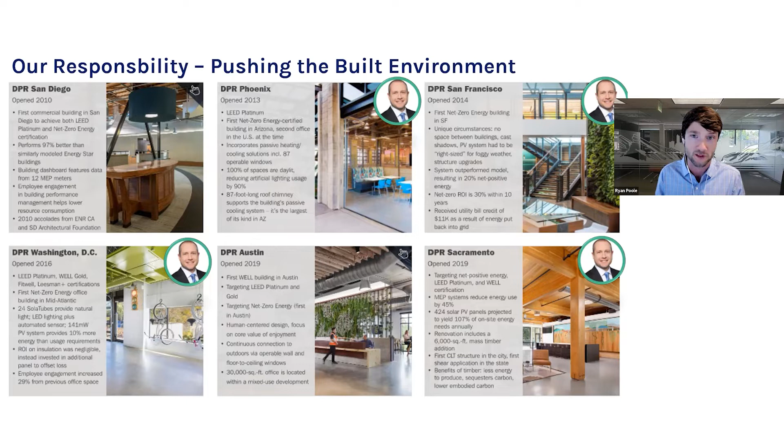Some of the specific strategies we took, it's important to mention that each one of our offices is in a different climate zone where we focused on zero energy. That was so we could particularly focus on different features within each one of those. This highlights 6 of those and some of the different strategies, some similar, dependent on the specific climate zone and situation of the office space. Really excited for Marshall and Stet to get a little bit deeper into the strategies we took specifically on the new Sacramento office.

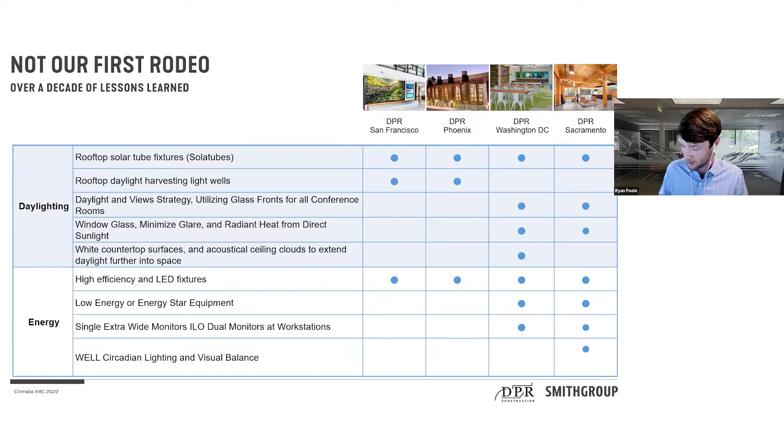A little bit about the path to net zero energy and our DPR recipe. We've created a high-level graphic that showcases what we believe is the minimal features to put in when you're trying to create a zero energy space. You'll see common things like rooftop photovoltaics, and then some more unique solutions like solar tubes or a vampire shutoff switch, which kills all of your non-immediate power for the night.

Operable windows, building performance monitoring, and also our very prized big ass fans, which are high volume, low speed fan systems that keep air circulating through our space for wellness and energy reduction. We're excited to continue talking about how we've utilized some of these strategies in specific locations. I'm going to kick it over to Marshall and Stet to start us off with what the owner's project requirements are.

This project was unique for us. Normally we're given a set of owner's project requirements, but for this one, we are our own owner. So we did take a moment to stop and think about what we're doing first, and let's go ahead and still continue those best practices we have for other clients and projects, and do that for our own. This set we see here is specific for the Sacramento office.

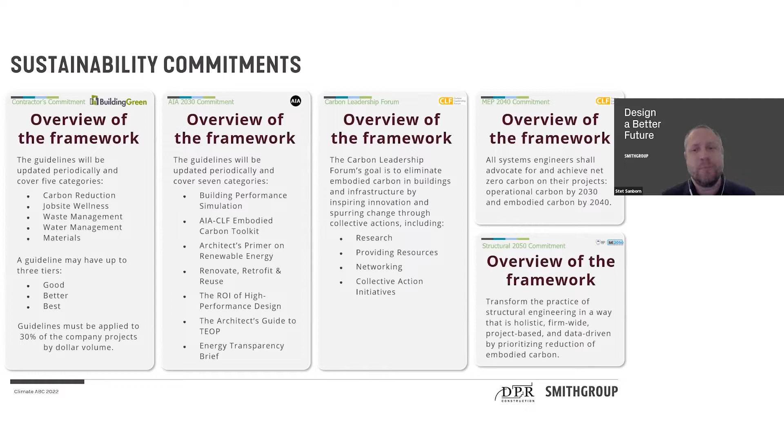When we look at them collectively, we can actually have a tremendous impact on reducing the carbon footprint of our buildings, and challenging the way that we build. And it's not just about the carbon, it's also about the experience. Part of what we'll talk about today with DPR's Sacramento office is how those things overlap and help reinforce a more holistic message.

Let's recap that common theme we'll be talking about through these commitments in our offices: embodied carbon, operational carbon, and wellness for the occupants. There's such a big synergy there that's sometimes overlooked in how we end up creating a healthier environment for both people and the planet, because they're one and the same.

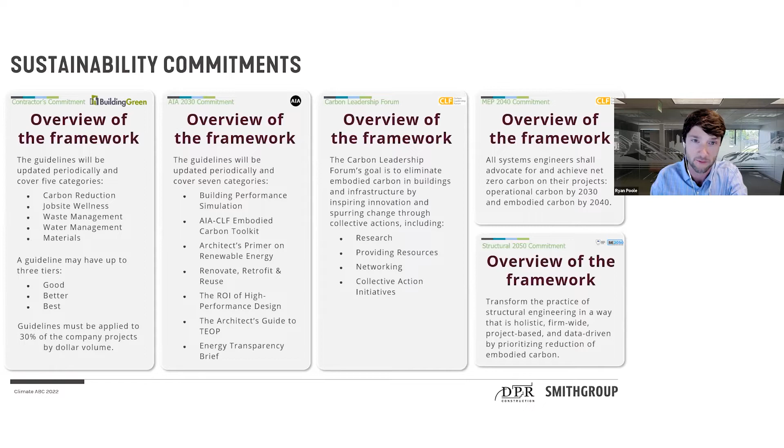I'm going to jump in and show you where we are in that 2030 AIA commitment. We're trying to march towards all of our new construction by 2030 being carbon neutral, whether through on-site PV, on-site renewable energy, or offsets. But we're really close to 2030. When I look at the calendar, I get a little nervous—it's 8 years away, a little less, that we need to be carbon neutral, and that's really to avoid completely catastrophic climate change.

We're already seeing the impacts of choices we've made in the distant past, and we actually should be going faster than this. But today, if I were to meet the 2030 challenge, I'm really trying to target like an 85% toward carbon neutral for all construction today. So we're marching towards that.

The DPR Sacramento office is actually a case study in how to go faster and do better—how can we go above and beyond the 2030 target today, at a reasonable cost, in the time frame, with today's technology? And it's possible. So today's message is both energizing—like, you can do it—but also, it's not that hard, so we should be doing it. Everybody should be doing it. So it's a little bit of carrot and a larger carrot.

One of the really interesting things as we design net zero energy buildings, from an operational carbon standpoint, we talk a lot about putting solar panels on buildings or near wind farms—renewable energy to offset our use. One thing we haven't talked about until recently, really the last 5 to 8 years in a robust way, is: if the operational side goes to zero, where's the rest of the carbon coming from? A good chunk of that is on day one of the building, not over the 30-year or 50-year lifespan.

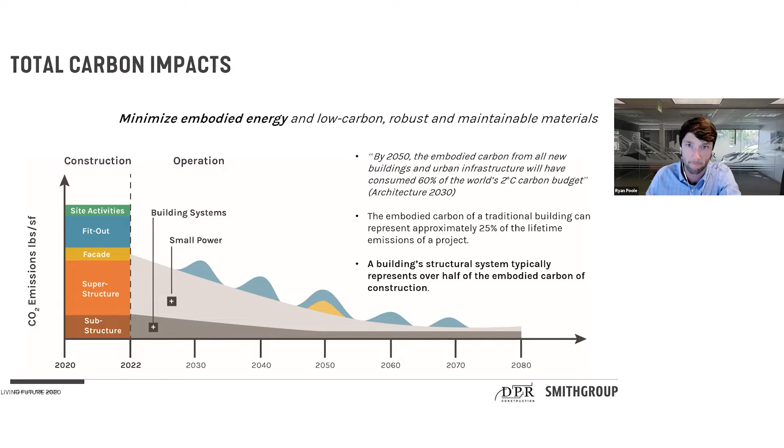A nice takeaway from this graph: in typical building construction, the structure itself takes up over half of that carbon footprint. So if you want to spend your time wisely on where to focus your efforts, just going after the structure alone is going to have your biggest impact with minimal effort.

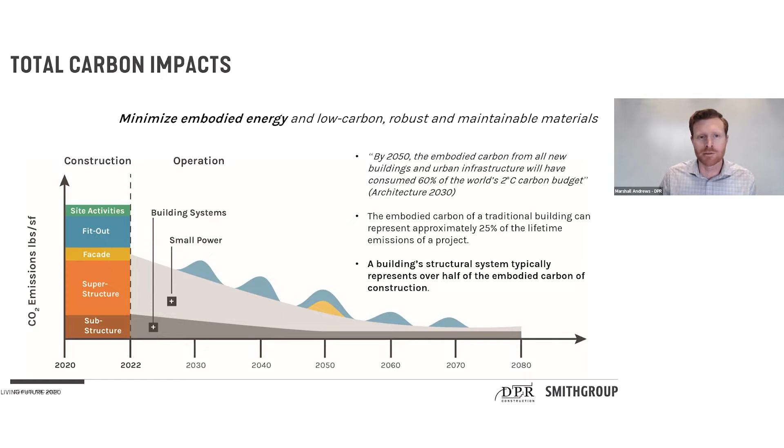Great point, Marshall. Yeah, that's absolutely true.

If you want to go one step further, this is really where the Sacramento office for DPR is a shining point, because we only build so much new construction in the United States. Brand new buildings on clear sites are a very small fraction of the overall building stock already out there. And if you think about embodied carbon, how much carbon it takes to build a building, we have billions of square feet of buildings where that embodied carbon has already been released. It's already in the atmosphere, and we're already dealing with the consequences.

So if we want to be really strategic about cutting embodied carbon, one of the best things we can do is look at existing buildings and make them more efficient. Rather than tearing something down and starting from scratch, there's a lot of embodied carbon in that structure that can just sit there—it's fine, it was already expelled, just let it be. Now let's bring up the rest of the building, improve its efficiency, and drive it to net zero energy, or even better, net positive energy—actually make it a source for offsetting somebody else's carbon footprint, or the original embodied carbon that went into the building in the first place.

That's really the target of what we're going to be talking about today: the benefits of adaptive reuse, and why it's the holy grail of decarbonization—taking existing buildings and driving them to net positive energy.

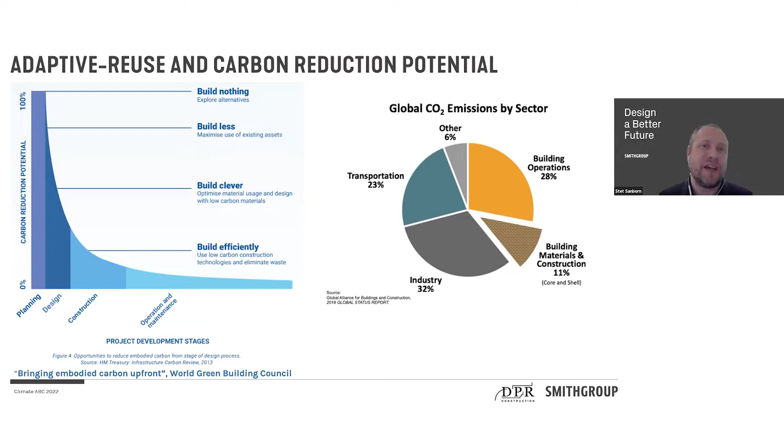Getting a little deeper into adaptive reuse—fun fact, all of DPR's living labs are adaptive reuse facilities. Some of them have unique stories behind them as well.

Our Phoenix office was an abandoned adult film store in a bad part of town. So not only is there the embodied carbon aspect of telling these stories and creating a high performing building, but there's also the community uplift piece—revitalization, going into areas where we need some urban recovery.

Great point. So one of the things, for every building, for a designer, for an architect, is trying to root your design in place. What does it mean for that location?

When Ryan showed earlier the matrix of all the DPR office projects, notice that not all the strategies were the same for each building. A lot of that is actually responding to local climate, local conditions, how a building meets the street, how it forms an urban edge. These critical design ideas influence the way that we come in with an intervention.

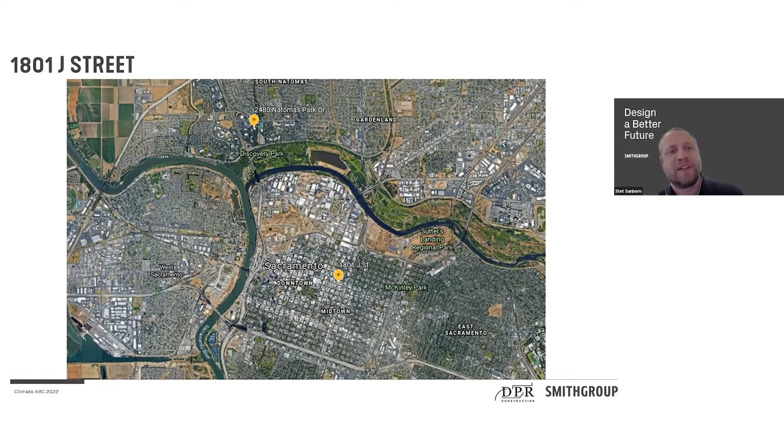This particular project is right in the heart of downtown Sacramento, in the Central Valley for California. There's a number of really unique aspects to that area that can inform how we react to the building.

As we take a look, there's elements of community connection—Sacramento has an extremely rich, close-knit community. And there's a lot of elements from that city that you're going to see weave their way into the design.

One of the parts that gets me the most excited, both as a bioclimatic architect and as a mechanical engineer, is Sacramento's climate, which is extremely unique—completely different from where I grew up in the rural Midwest. There's this phenomenon in the Central Valley where they have a really high diurnal swing: daytime temperatures in summer can easily be over 100 degrees, but at night they often cool down into the low 70s.

That huge swing from day to night affords us a lot of opportunities from a thermal energy storage standpoint, letting our building work in tandem with nature instead of using systems to try to overcome it. That's one of the key elements as we work on these adaptive reuse projects—trying to work with the local climate.

Usually when you work with the climate, your energy use will go down. It's when you try to fight everything that your energy use goes up. So step one in this process is learning where you're at and taking advantage of the phenomena that are there, whether it's energy, climate, water balance, or whatever the element may be. If you can work with it, chances are your building's going to be more successful, and you're going to have to do less to make it successful.

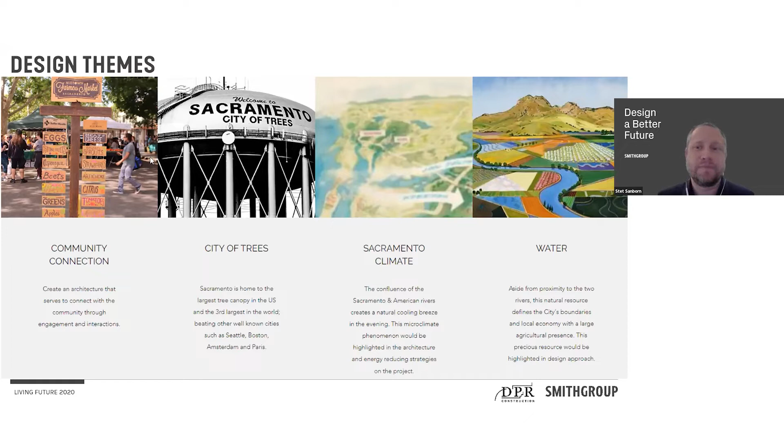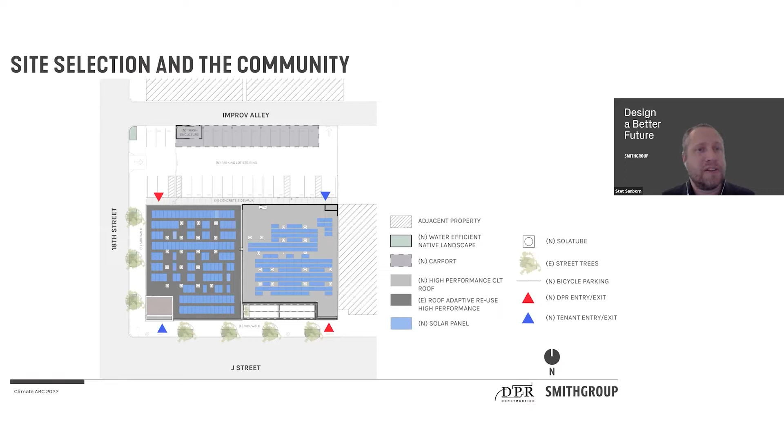We try to maximize community connection through adjacencies around public transit, while also providing parking and shower facilities on site. There are a lot of sustainability programs, whether it's LEED, Well Building Standard, or Living Building Challenge, that emphasize a much broader conversation around sustainability—it's not just a carbon focus. You can use that analysis as a methodology to further reduce impact and dig your roots into the local community.

When it came to trying to find a site, we made sure to take a moment to pause and really think about where we wanted to go. We were already established in Sacramento for about 17 years, and even looked internally at whether to retrofit the office where we are now, or move somewhere else. For somewhere else, we looked at several properties and used a Choosing by Advantages framework to figure out which one was the best fit.

We looked internally at what it really means to us—either renovating or relocating our office. For your projects, it doesn't have to be the same number of criteria; it could be more or less, but this is what fit for us.

We really wanted to get that cultural fit. We have a lot of culture in our company, with employees who are very passionate about it and also very passionate about where they live. We wanted our office to reflect those values and considered that when looking at the different properties—same with the Sacramento identity. Then we asked: does this building have the opportunity to be inspiring? Does it have the opportunity to be sustainable?

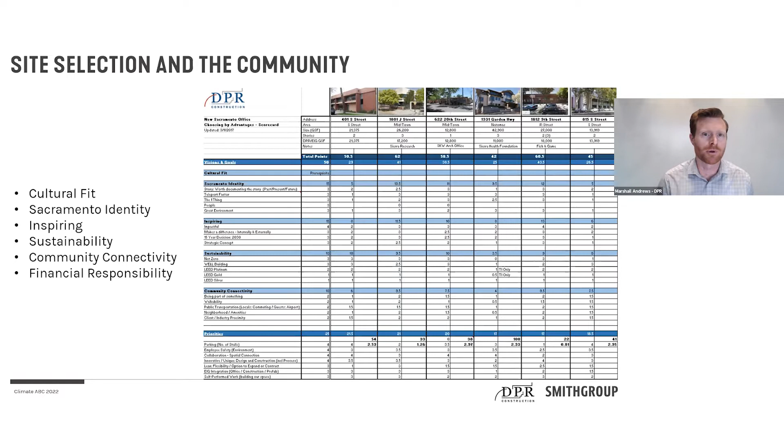You can see up above the existing building—and to Ryan's point, not only are we making this more sustainable, but also doing a bit of a re-beautification. It's located on very busy, well-known streets in Sacramento, but was a very forgettable type of building. It was built in 1940, had some renovations in the early 90s that looked more like the later 70s, and I'm sure the client loved it, but probably not the greater use for more folks.

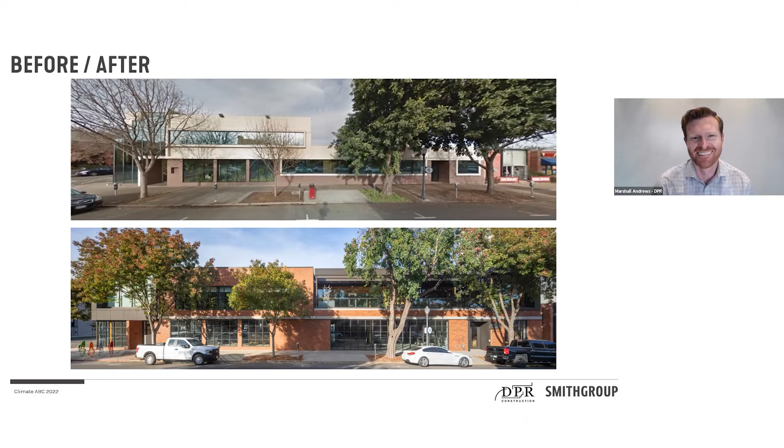The trees even look happier, Marshall, right? Like it's— yeah, they decided to sprout and grow.

There's one other thing I wanted to add, particular to this project. What you can't see is if we could peel up the street and show all the infrastructure in a community that supports a building—sewer systems, stormwater systems, potable water systems, it's all already there in the street. One thing folks often overlook with adaptive reuse, especially on this project where we're adding density and new square footage, is that we don't have to put in new infrastructure for that community.

Whereas if DPR had chosen to build on a brand new greenfield site just outside of town, a lot of that infrastructure would have had to be expanded.

That's additional embodied carbon that would have gone in to support that new growth in a new direction. But when we build in the urban core, the majority of that infrastructure is already there and we can rely on it, keeping density of use tied to it. That infrastructure will have to be repaired and maintained over time, and the more use we tie to it, the less maintenance per use, and the more we support with each investment already in place. If we peeled up the street, you'd see a lot of investment the community has made over time that we can still harness. That's really important about adaptive reuse within the urban center.

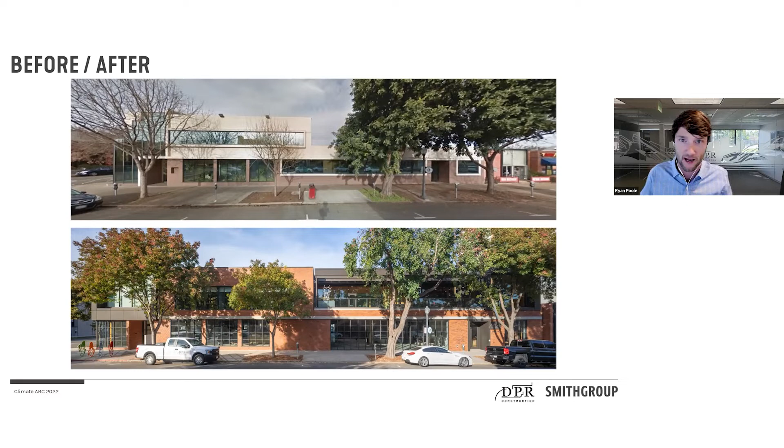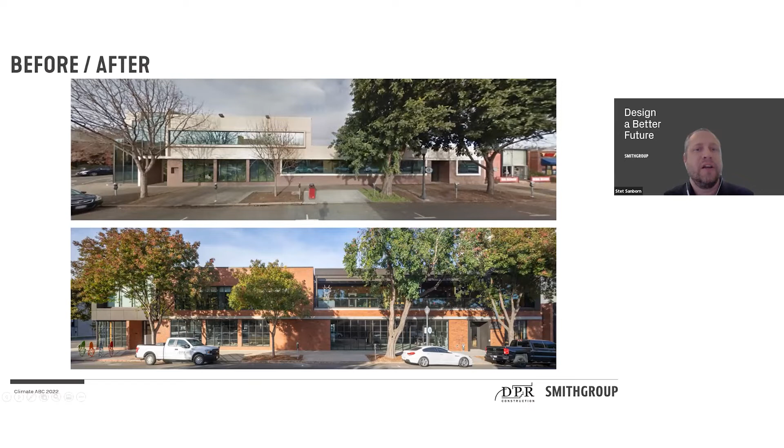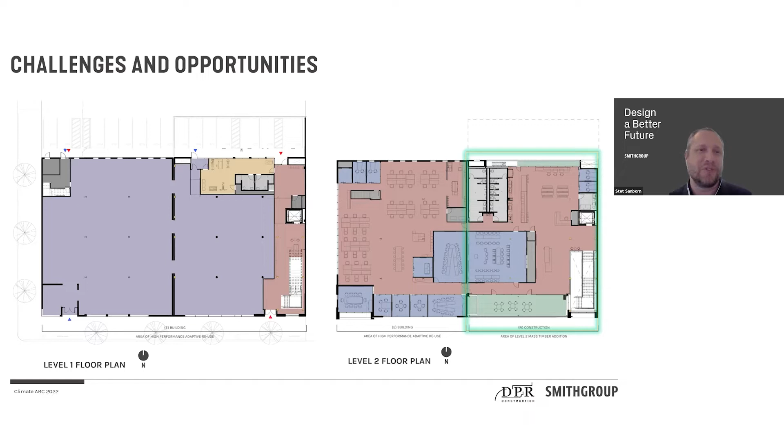The part highlighted in green on the right-hand side is all new — that wasn't there before. That's the added density from a retrofit, repurposing the whole building while also adding density to meet DPR's program requirements for staff, but also giving us a chance to bring new life into the space, creating new opportunities for connection with nature and ventilation. Marshall's going to do a deep dive through some of those strategies that were folded in. By adding that density, it also opens up freedom from a design standpoint to pull in a lot of things that benefit the occupants.

Well said. So now we'll get into some of those specific strategies behind the design, guys, and how we really drove operational zero energy.

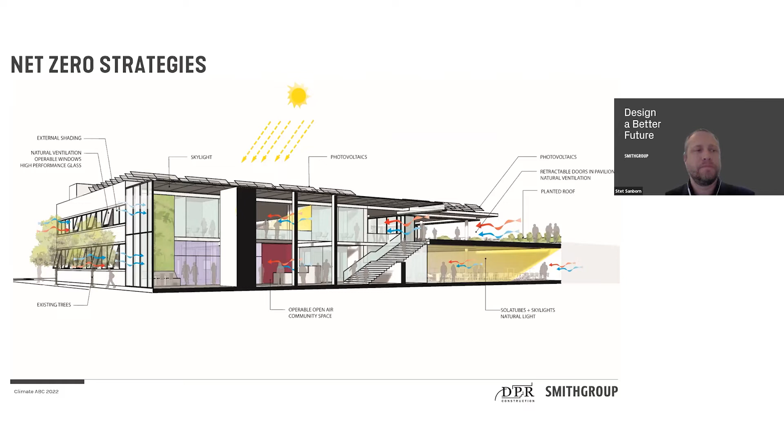Take a look at shading strategies — how much light do we bring in, where do we want external shading? We get a bit of an energy benefit by not overheating, but also an occupant benefit by not producing too much glare while people work. The existing trees from the site selection really help with natural shading when we want it in the summer, and in the winter the leaves fall off and we get a little extra solar gain.

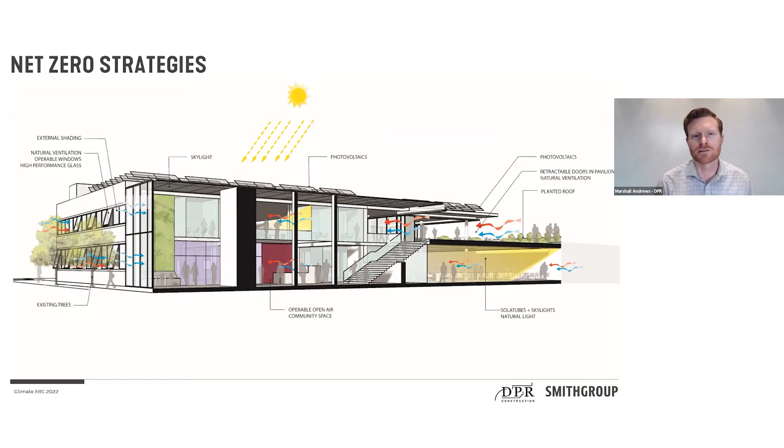There's also some planted roof space and retractable doors to take advantage of natural ventilation, which reduces our energy footprint because we won't have to use as much heating or cooling.

Another thing to add here, Marshall, is that the natural ventilation in our space has been a huge plus during the pandemic, because it's allowed people to feel more comfortable coming into the workspace due to the air exchange. So that's another good point outside of the climate issues.

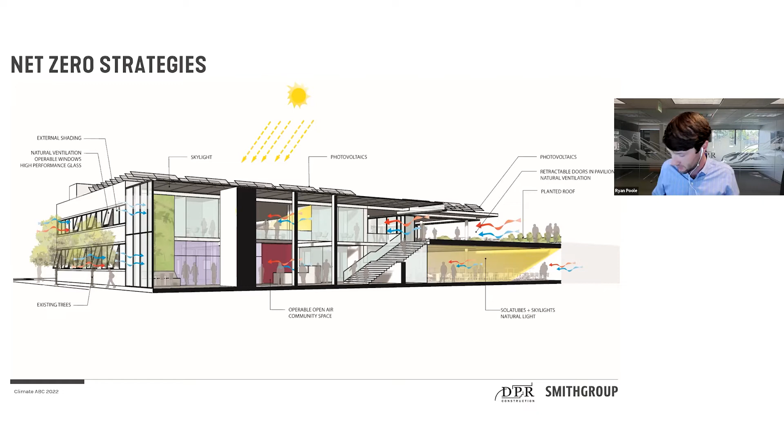Another cross section, looking at it through a different way, and you can also see the occupant experience. On the right-hand side is our main entrance, where we placed a stair right at the entrance. We used the concept of an irresistible stair. We do have an elevator, but the stair is beautiful, right up front, and unconsciously helps people get a little bit of extra steps in their day, working into employee wellness with a nice experience and healthy building.

You can see here on the right-hand side we have that operable wall, paired up with operable windows on the left-hand side, giving us full cross ventilation through the space.

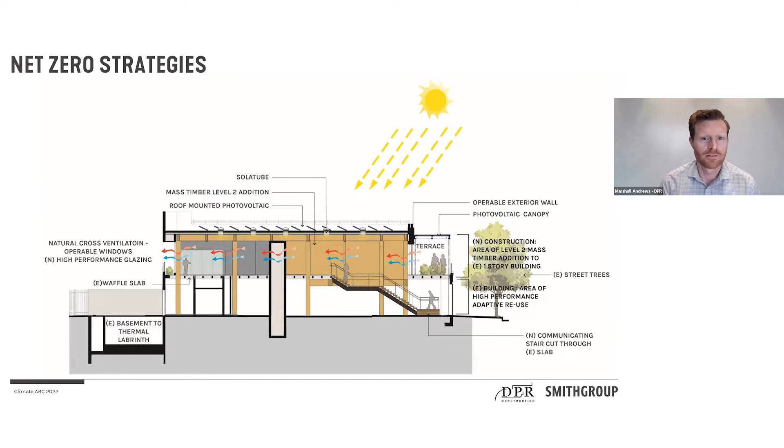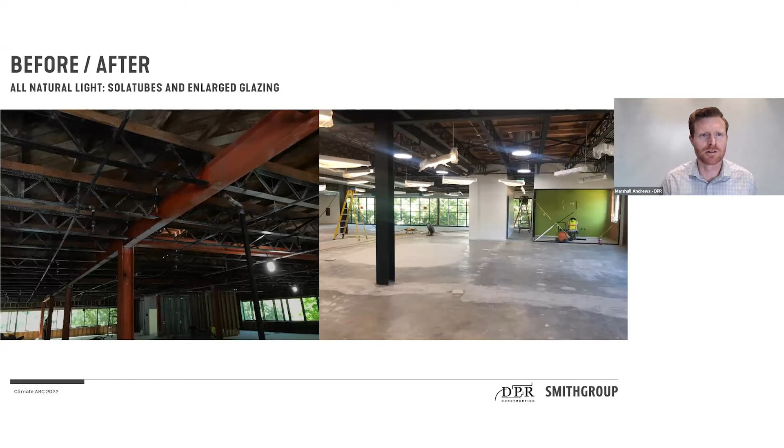The solar tubes are there not only to support lowering our energy use intensity, but also to support health and wellness around circadian rhythm, making sure we pay close attention to the natural light we get in our space and how synthetic light can, over time, compound issues physically.

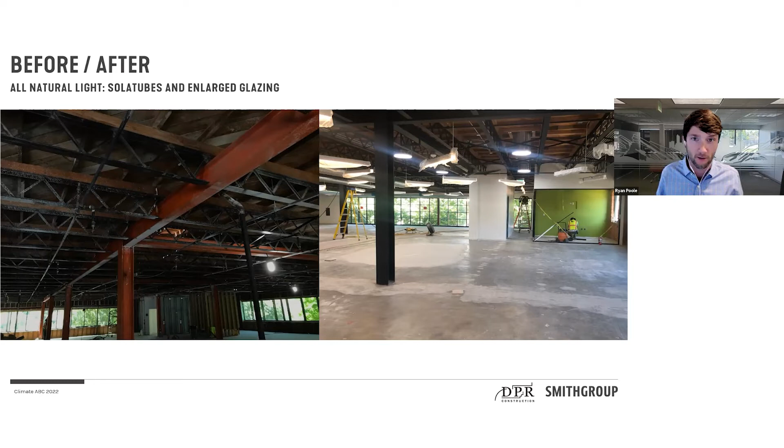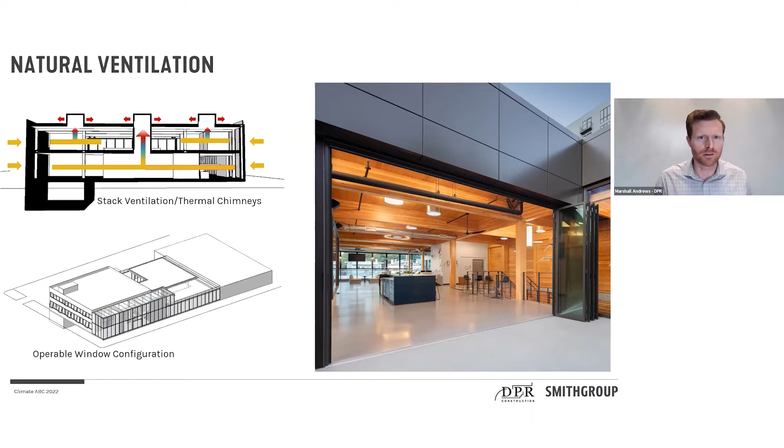This is another perspective with the full build out of the existing building half. You can see the conference rooms on the perimeter. We used glazing to the interior as well in the conference rooms, so you get sight lines all the way through the building and natural light all the way back in. On the new construction side, you can see the operable partition that really opens up windows beyond there, helping blend inside and outside, bringing the outdoors in and the indoors out, with natural air flowing through for our occupants.

This is one of my favorite features. It can be a challenge but also fun with an existing building, you have to deal with the hand you're dealt. With this building, we had a portion of existing basement we had to abandon. We had more parking on top for our program and couldn't meet code for a second stair out of there, so we had to give up about 6,000 square feet of basement we were originally planning on just filling with rock. We ran cost studies on how much it would cost to fill with rock, and it was pretty expensive. Bringing in other partners from different areas, one of them said, hey, you could do a thermal labyrinth with this building. We said, cool, great sounding word, sounds fun.

Sorry, no idea what it is. Can you please explain to me what a thermal labyrinth is?

He said, yeah, you can take all of your outside building air, which you see in the couple red arrows, bring it in through an intake, and it'll come down into the existing basement. As it goes through the basement, you throw some more walls in there to slow down that airflow and increase heat transfer, the labyrinth side of it. It will naturally pre-cool that air before you put it up to your HVAC system. So if it's say 105 outside in summer, which we do get several peak days that hot, we predict through energy modeling that we'd be able to precondition that air by 14 degrees Fahrenheit, bringing it down into the 90s, which is huge, particularly when sizing HVAC systems. Not only are we saving energy and carbon, but even our total HVAC size can be reduced on day one.

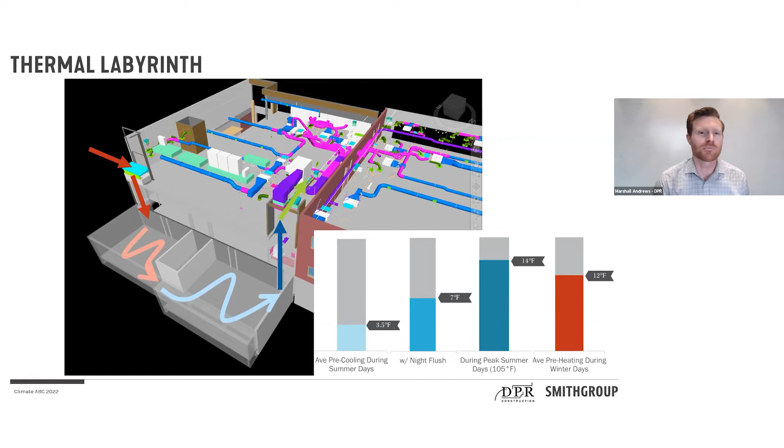Unique for Sacramento, right? So it's a great obstacle.

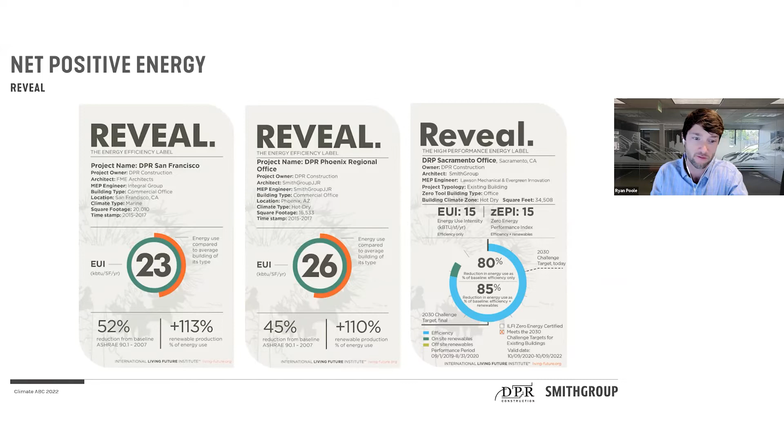Using mass timber. A key element of this project was, on top of the energy use, tackling that embodied carbon.

The big move on this project was working with the team to actually target low embodied carbon construction technology, and also, I would say selfishly for SmithGroup, and to a certain extent DPR, learning how to do some of this new technology on our own work before we talk to our clients about it.

That's a great segue. Talking about embodied carbon, looking at our traditional structural steel components, Marshall pointed out in that earlier graphic where your structure can really be the biggest embodied carbon impact on a project from a material perspective.

So we're talking about wood, one of the only renewable resources we have, and it absolutely sequesters carbon throughout its lifetime. We're going to talk about how that sequestered carbon gets installed inside the buildings, but I want to make sure to note that even though wood has made a big leap against steel and concrete, recently there have been really great inventions with low embodied carbon concrete solutions as well. So lots of exciting, innovative solutions coming out to help tackle these issues.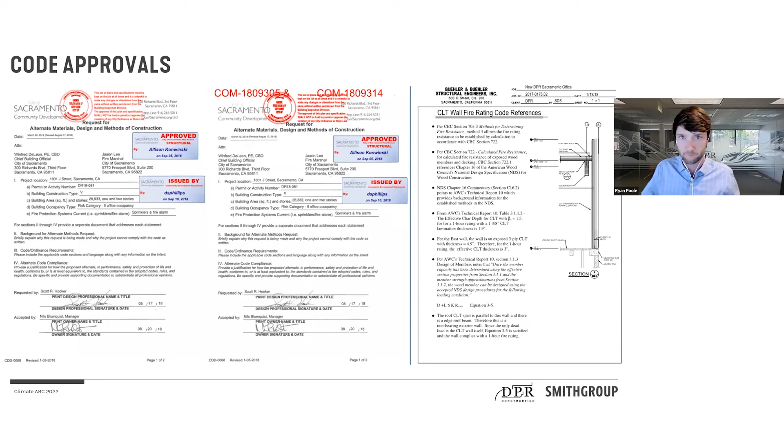For the mass timber components, it is new and exciting, particularly when we built it here in Sacramento. It was not in the current code, not part of the current code when we set out to build it, but it's a great story.

It embodies carbon. It's this new, interesting material that clients want to put on their projects, and we wanted to learn how to do it. So we sat down with the city, and the city was actually pretty excited about it too. They wanted to learn how to do it as well.

With some early planning meetings, we told them, here's the building, here's what we want to do, here's the expansion we want to do, and we're thinking about this mass timber thing. We asked, do you know anything about mass timber? And he said, yeah, we've actually seen it.

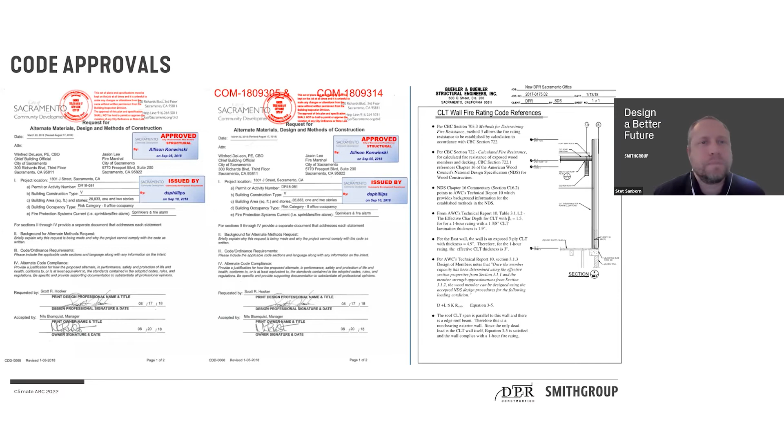We have about 6,000 square feet of addition that we want to do. It's an existing building that had some structure to allow for future expansion. They said, yeah, it actually is kind of a perfect test case for us to go through—low risk as a city to approve. We think it will be a pretty safe bet.

And here's how we want you to go through an alternative means request to go ahead and get approved, since it's not codified. So they had us break it out into three different parts: one to address diaphragm in the structure, one to address seismic and shear in the structure, and one to address fire rating. This way we could tackle each different part that's outside of code on its own, and divide and conquer.

So that's what you're seeing here. We did work with a company called Woodworks that we definitely want to give a shout out to.

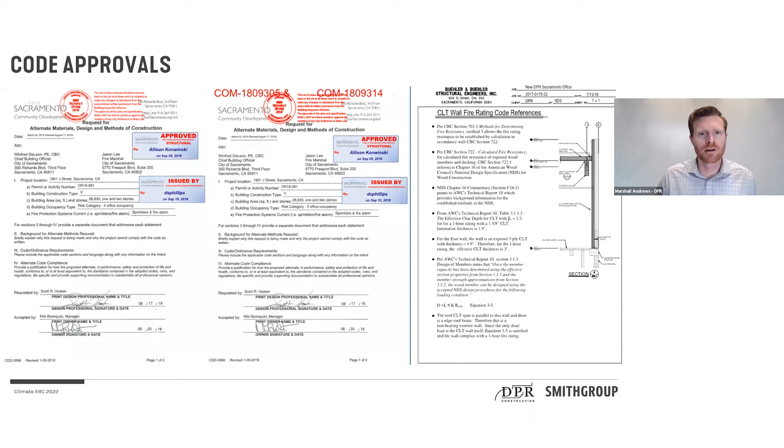They did an incredible job helping us with case studies and approvals that other cities or states have gone through, so we can show precedents that this is out there and this does work. We're quite confident it will be part of code, but code follows certain cycles. So here's some shared knowledge we can bring to help push the project in your local area.

Great, and just to be cognizant of time, we did full life cycle carbon assessment calculations for the project, sort of cradle to grave, or cradle to recycling, or cradle to compost, depending on the flavor you like, for this project as well as a lot of our projects. We're doing this more and more, and being asked to by clients.

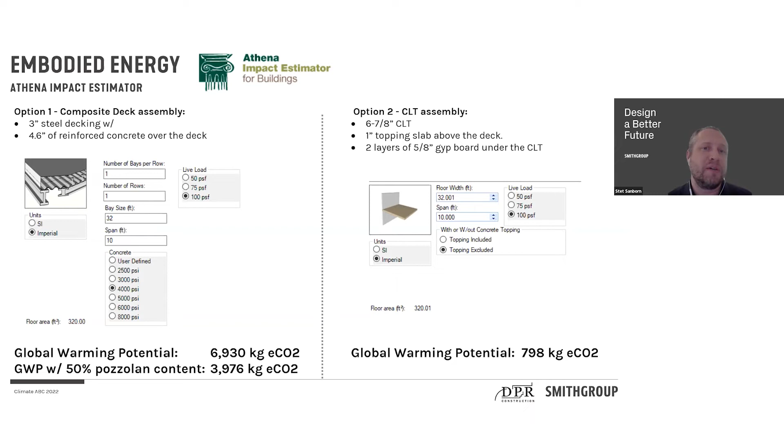For this particular project, being able to switch from a traditional construction method to cross-laminated timber, or heavy timber, saved a significant amount of carbon. It ended up being the equivalent of 33 cars off the road for an entire year. That's a pretty good chunk of carbon.

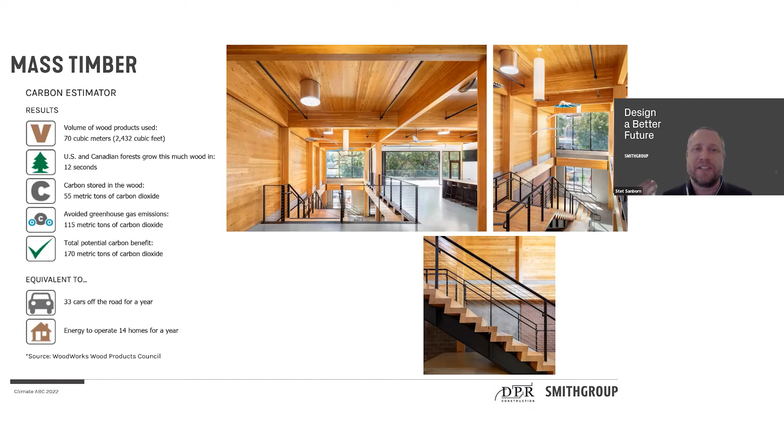Obviously it has energy benefits and embodied carbon benefits, but something else that's really powerful is that it's gorgeous. It's a carbon savings, but it's where you want to be. I've been in this building a bunch of times now, and I keep advocating to our office, can we just move in? This is where we want to sit when we're working on projects in Sacramento.

So just the last couple items. I think one thing we don't want to gloss over, and it's really important, is the community engagement aspect. This project had a lot of community partners, both local artists and activists, who helped plan some of the installations and pieces that went in.

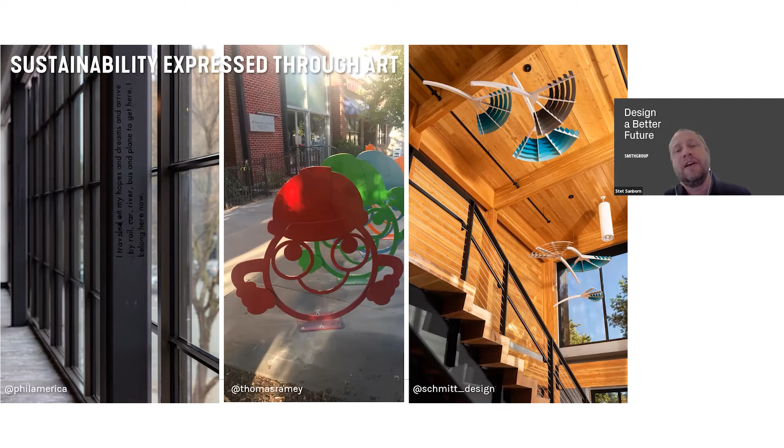And from a design standpoint, if you go to the next slide, Ryan, even some of the finishes in the space were chosen to remind people of those carbon chains, of what's happening from the overall design and impact standpoint. So it's not just surface level, but trying to keep everyone thinking as you look forward, discovering new things in the project the longer you're there.

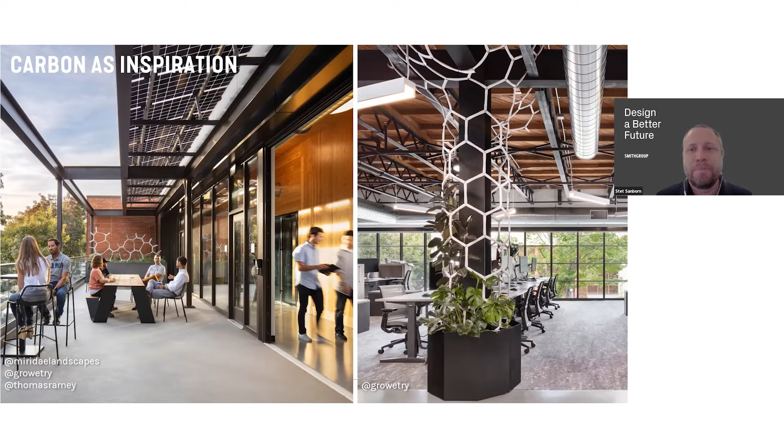And so with being a living lab, we do want to keep score. For us, it's not just important to design something to be net zero energy, but we want to follow up and verify that it is net zero energy. And if things start to go awry, we want to set things up so we can properly investigate.

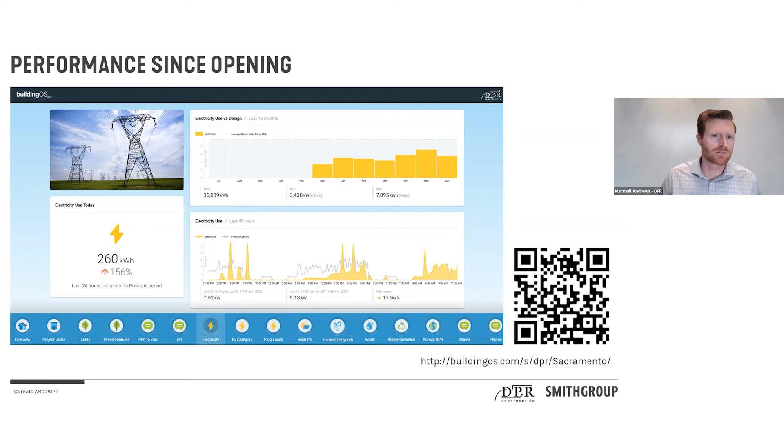So we had a very complex energy metering strategy, so we can break out what's our heating load versus our lighting load, and tackle problems where they are. It is a public dashboard, we have links to it here, and also a whole lot more information on other DPR office projects, including more videos, tours, and extended learning to go check out.

Worth noting, Marshall, that we now have all of our offices on this platform collecting our data, and some of them being significantly more sophisticated, like the Zero Energy office in Sacramento.

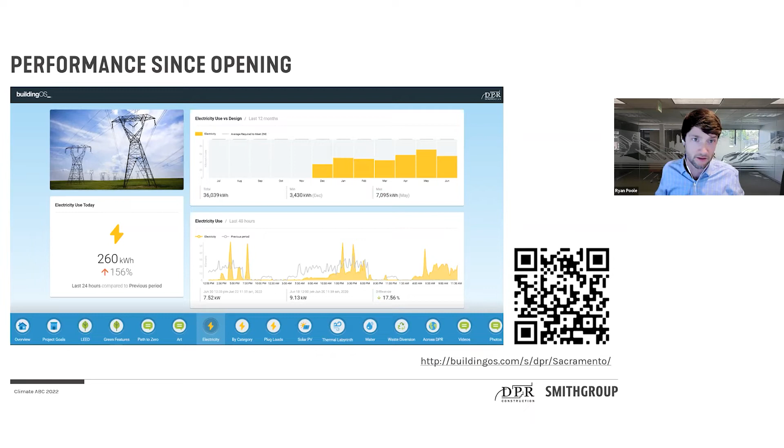So, lessons learned to date: get uncomfortable, be relentless, and listen to others. I think this is really driving back to getting in that collaborative space together super early and figuring out where your roadblocks are. Stet, some more to add?

I would say the big challenge is to continue to do better. There's no reason that once you solve a problem, that's the last solution there is. Each one of these projects, and why it's so fun to work with DPR, is each one is getting better, and I think each one has a bigger impact in the community. So, yeah, keep going.

All due to the amazing partners we have, right, Stet? Yeah. And Marshall, we'll close it off. Any final comments? With everything connected, there's a lot of overlap and things that are juxtaposed, and at times it can seem overwhelming to try and put all the different pieces and parts together. But going back to, we have great people, we want to take care of great people, we bring on great partners, they help with a lot of that heavy lifting and bring a different viewpoint in, and with everyone putting in their 2 cents, you get something that's really greater than the sum of all the parts and pieces going into it.

So it's worth the effort. I think the final word here is resiliency. And it's specifically talking about COVID, but I think we're talking about resiliency to all things, right? Resiliency to climate change, resiliency for wellness, resiliency to create a healthier planet. So with that, Susan, we'll turn it back over to you.